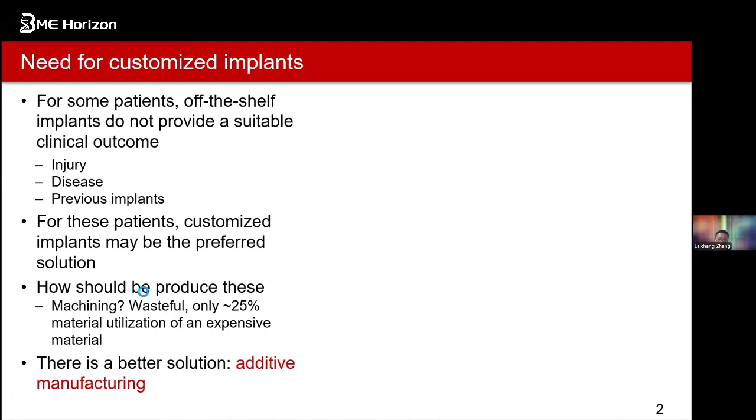Keep in mind, titanium material is quite expensive, and with this kind of waste, only about 25% material utilization is achieved for such expensive material - this raises costs for the patient. Therefore, 3D printing or additive manufacturing is a better option.

Especially for injury or disease cases - this is one real example from our customer, Royal Perth Hospital: an example of manufacturing a customized implant for a patient with osteoporosis.

So far, there are some materials that can be used for the structures. Most of them are commercial purity titanium alloys, and also titanium 6 aluminum 4 vanadium. Most of these we use for implants to replace our cortical bones for human beings.

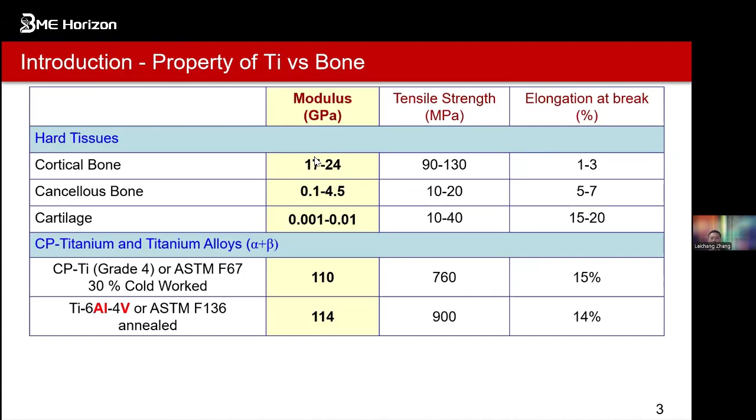But because there's a lot of difference between the Young's modulus or stiffness of the cortical bone and titanium alloys, this produces the well-known stress shielding phenomena. This will then require further surgery to fix these structures from the implant.

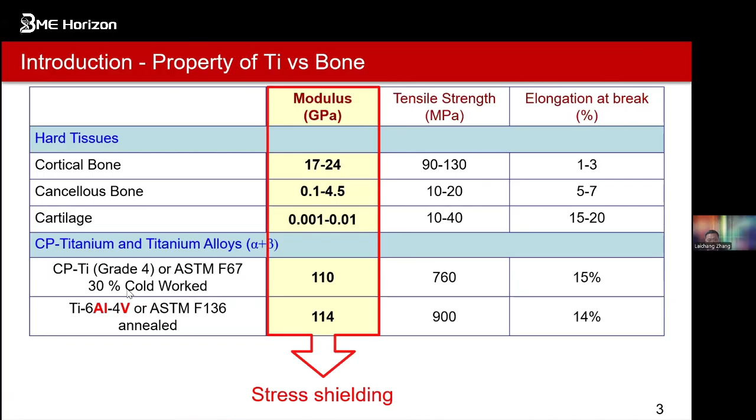So for this kind of way, we can still use porous structures to further reduce their modulus. We need to further optimize this kind of structure production. And of course, these complex porous structures can only be produced by 3D printing.

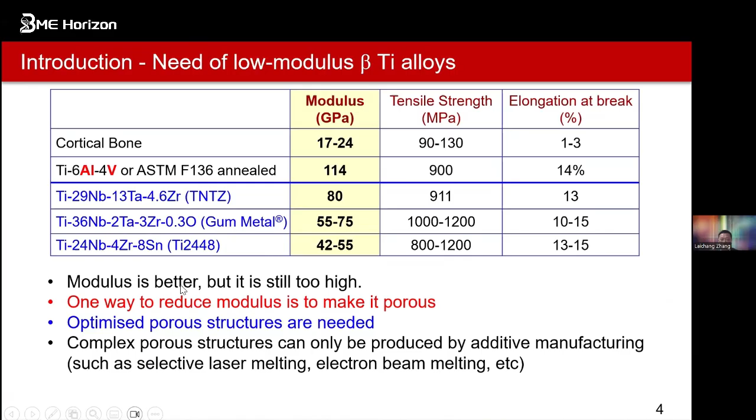For example, selective laser melting or electron beam melting. Of course, there's also a transition away from powder metallurgy for these things. So when we try to make anything here, we produce these structures.

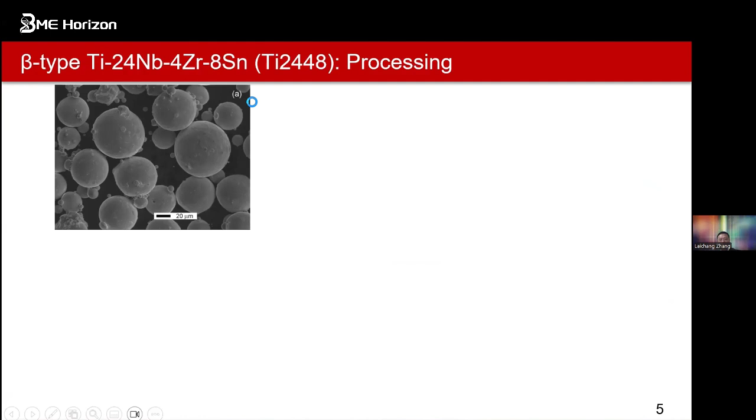So you can see with this kind of beta titanium alloys, we use mostly titanium. We start from spherical particles - Ti-24Nb-4Zr alloy, with niobium and zirconium. From the powders, we can produce the structures using 3D printing, which can give us the Young's modulus we want.

We should use the parameters from processing - for example, the laser power, velocity of the laser scan, hatch spacing, and layer thickness. With these parameters, we use a zigzag pattern to produce 3D printed parts from the powders for titanium cubes or structures.

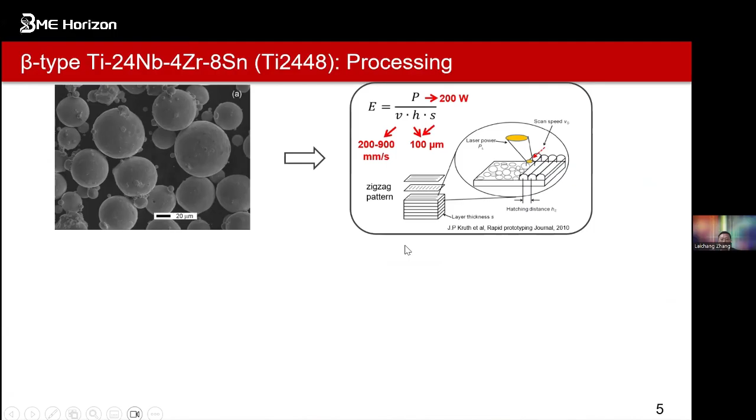Based on these things, the relative density is very important to get high performance in mechanical properties and corrosion resistance. For example, if the structure density is lower, the strength will not be good enough, and that's why it makes premature fracture. That's why most of the time we try to make the solid part more than 99% density.

So that's why we get this information with different parameters. We can see with the laser kept at 200 watts, reducing the scan speed, we can enhance the relative density, going up to 99%.

But we can still see the macro hardness tests will still increase with the relative density of these things, going really high. We can see that if the scan speed is roughly below 600, the relative density will go to 99%.

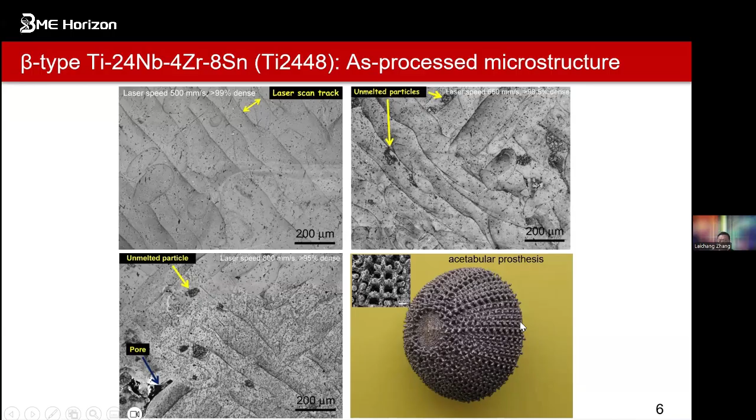They also produced an example of an acetabular prosthesis by selective laser melting at a laser power of 200 watts and a laser speed of 500 millimeters per second, because they can get near fully dense parts this way. We collaborated with the Royal Perth Hospital on this. The part has a complex and fine scanned scaffold structure on its outer surface, which improves bone ingrowth for implants of this structure.

We can also see the comparison of the tensile properties for the Ti-Nb alloys manufactured by 3D printing versus conventional processing methods.

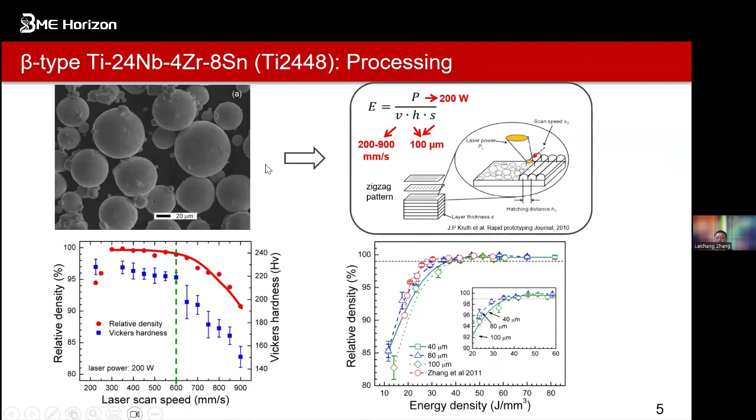Of course, we also produce a lot of titanium-niobium parts from powder mixing. Since this is from pre-alloyed powders, but we can also use a lot of mixed powder production to try to make the parts cheaper.

So we try mixing a lot of powder, and you can see the strength is very, very large, and ductility is also large. We didn't do much, but you can see that the ductility is quite large compared to the traditional way - that will be very, very good.

We can achieve more than 20% elongation in these parts, just by producing parts at low cost from pre-alloyed powder or from powder mixtures. But even this one still has a low Young's modulus, yet high strength.

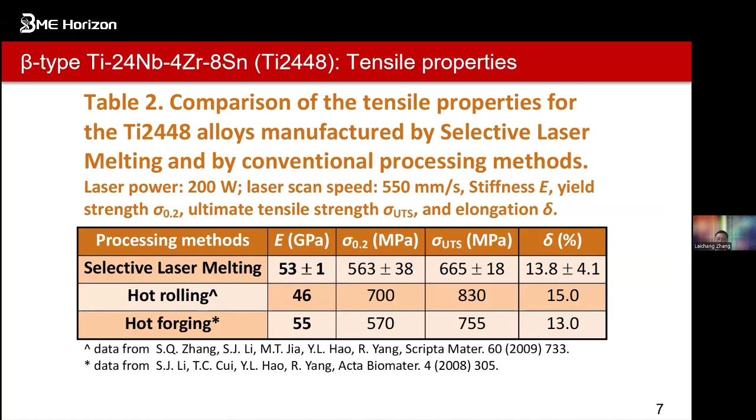As mentioned, the Young's modulus of cortical bone is roughly 30 gigapascals, but ours is 53 - still low, but we can further produce porous titanium parts with even lower Young's modulus. This way we can produce porous titanium alloys that can have a controlled, lower Young's modulus closer to the surrounding bone tissue.

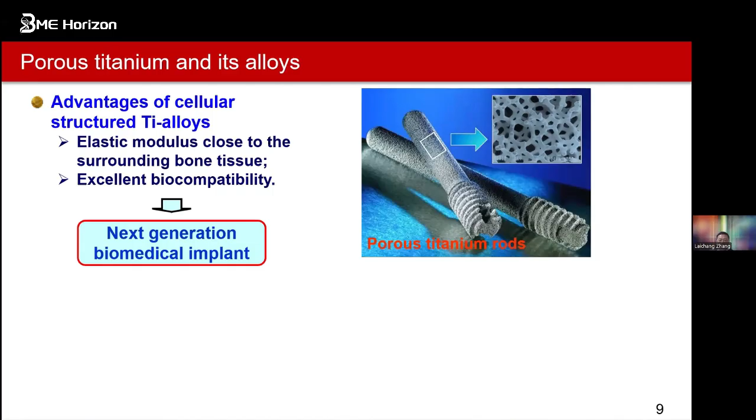Titanium alloys can have excellent biomedical compatibility, representing the next generation of biomedical implants. Traditionally, we can produce this kind of porous structure through powder sintering processing, gel casting processing, 3D fiber deposition, and self-propagating high temperature synthesis.

But for this traditional fabrication, there's one big issue: there are inherent limitations such as the presence of impurity phases, low porosity, and limited control over the size, shape, and distribution of the pores.

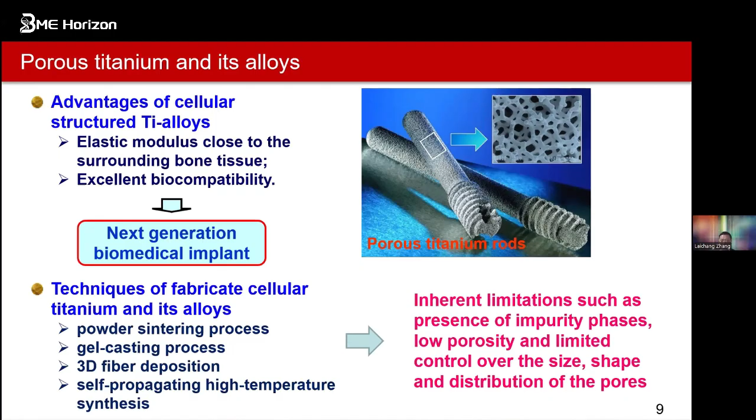That's why we had a lot of endeavors to develop new structures in this field - that's what we did. For example, with this approach, we can do many things.

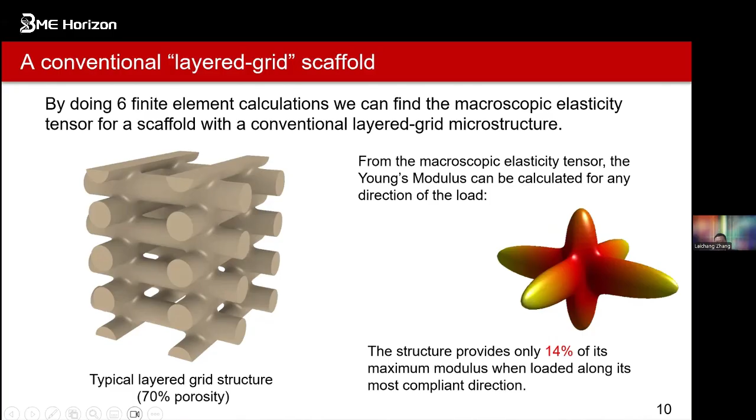inhomogeneity in elastic Young's modulus. You will see the Young's modulus, roughly the least stiff direction has only about 14% of the stiffness of the most stiff. So this is typically inhomogeneous of the structures. But we can also use the BCC structure.

So this structure has also been commonly used, but this is even worse in terms of the non-isotropic stiffness. You can see the minimum and maximum was roughly 0.09, so 9% of the stiffness.

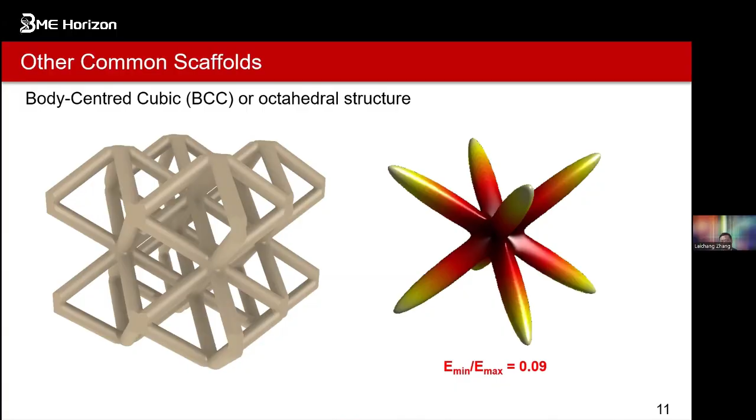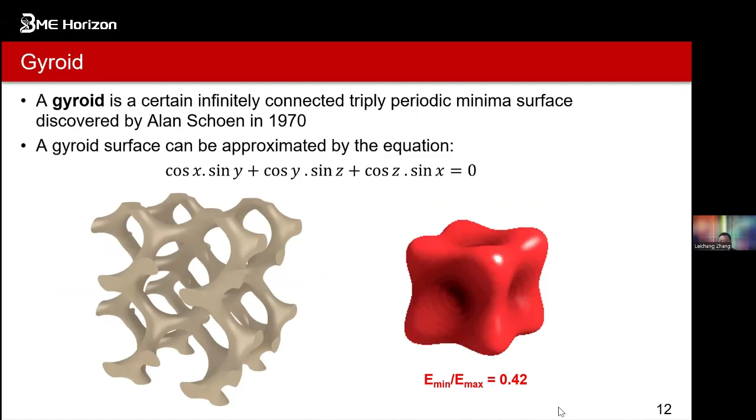Now another one is the gyroid structure, which has also been used, and it's better and also has better homogeneous stiffness. You will see the minima and maxima stiffness roughly 0.42. But we still say this is not sufficiently isotropic for this kind of structure.

So for these things, we use topology optimization to design the scaffold that would have maximum modulus for its weight and interconnected porosity. In addition, the design needed to be elastically isotropic and be able to be made in a range of different solid fractions.

So we proposed to use a computational design scaffold to jointly maximize scaffold bulk modulus and diffusivities of the pore space. This can ensure high scaffold stiffness and good transport process properties. And also, this is very important because this will try to make it elastically isotropic.

And also we have specific porosity because for different structures, for example if we come to our bones in head, face, and our skull, and also our knees and the shoulders and the legs, arms, of course the Young's modulus will be different. We will use one example to show later on.

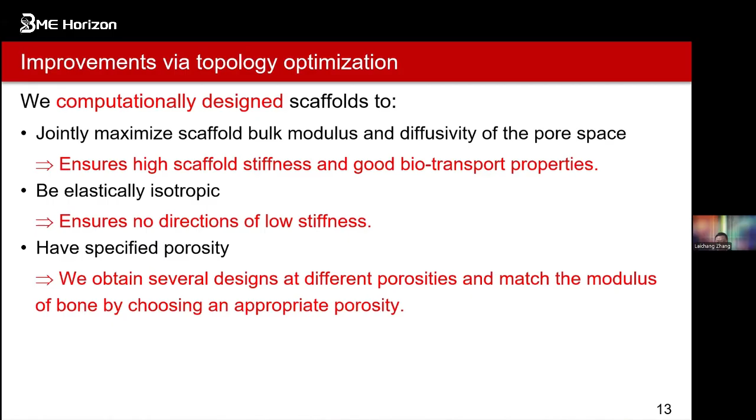So of course we try to obtain several designs at different porosities and match the modulus of a bone by choosing an appropriate porosity. For this kind of criteria, we design several types of porosity-optimized scaffolds.

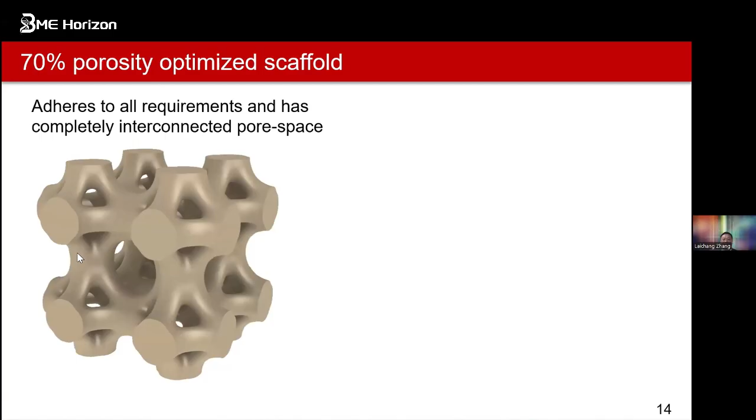For example, we adhere to all the requirements and we have this complete interconnected pore space. This is complicated, but this Young's modulus for all the way is homogeneous. So this is compared for the 70% porosity layered grid, it's roughly 0.14. So that means there's homogeneous structure in this kind of way.

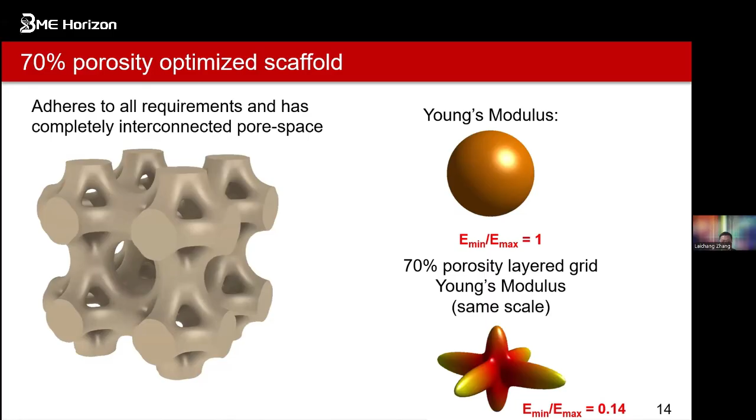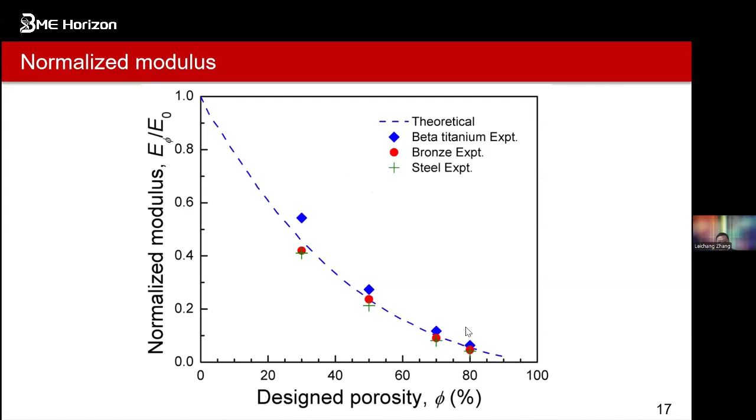That means this kind of structure can be produced very well. We can control the porosity and control the stiffness or Young's modulus, so we can make this close to cortical bone and match it for different locations.

We can see some examples of these things. For example, we try to match the modulus of bone, replacing cortical bone in the mandible. The mandible is used every day for talking and chewing, so we need a very comfortable implant.

The cortical Young's modulus is roughly 10 gigapascals, and we use titanium as the scaffold material, for example titanium 6 aluminum vanadium, whose modulus is roughly 100, let's just say 110, or 100 for example.

From this chart, we can get information on how to make the Young's modulus close to our implant, for example for the mandible model. Our target is 10, and the overall is 100, so 10 to 100 gives roughly 0.1. That's what we get from the chart.

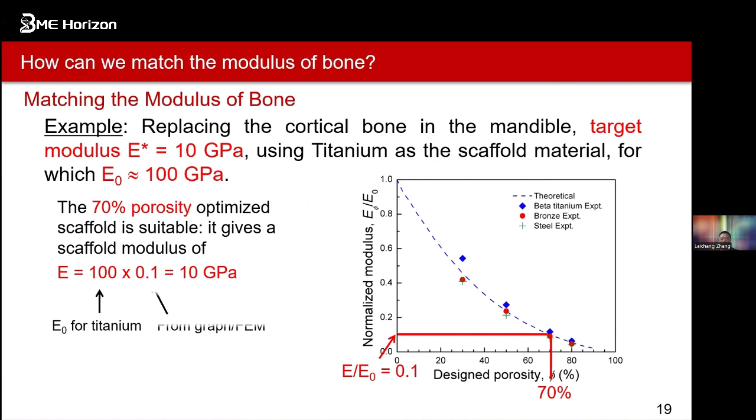So that's the work we can see for titanium from the graph — we can get the data very easily. Same way, we can use another material, Ti2448, a beta titanium alloy.

Again we're replacing cortical bone in the mandible, so again the target is about 10 gigapascals, but this time, because of the beta titanium, the modulus is roughly 50 gigapascals, as mentioned it's 53, but we'll use 50. From this chart we can say the normalized modulus is 10 over 50.

So from here we roughly get 0.2. From 0.2, this will be very useful — close to this value on the curve, we can see it's roughly 55%. So the 55% optimized scaffold is suitable for medical implants, giving a Young's modulus of roughly 10 gigapascals, so we can use this structure.

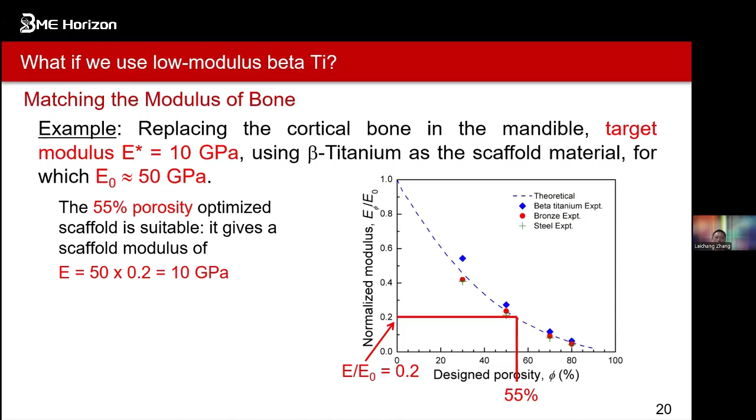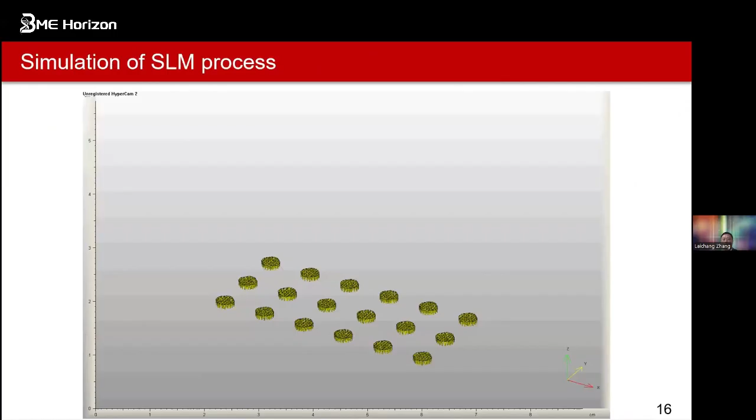So don't think it's quite easy to produce these parts using 3D printing — we still need a lot of technology, and we need the concepts. We understand 3D printing, then we can produce this kind of ideal structure. From the beginning, we tried to make this part as a whole, as a circle.

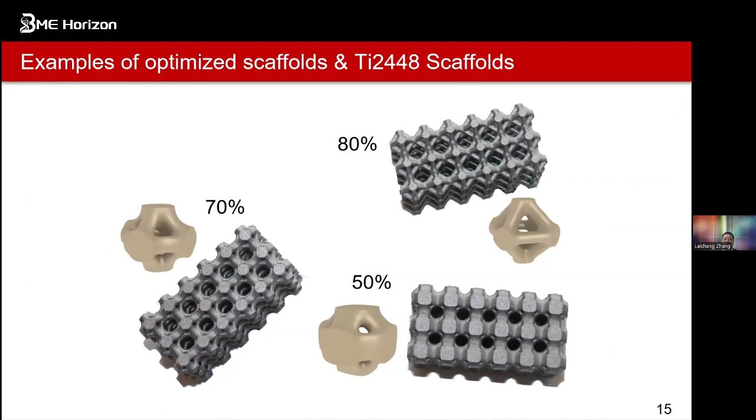For the first time, we produced this one totally closed - there's no opening. Then we tried to make this one open, like an ellipse, and then we go to a circle. So you can see it's simple, but not that simple. You still need a lot of skills and knowledge to make circles in the design.

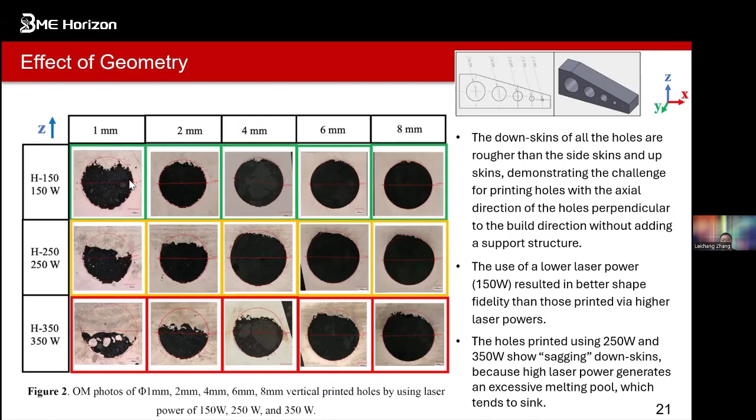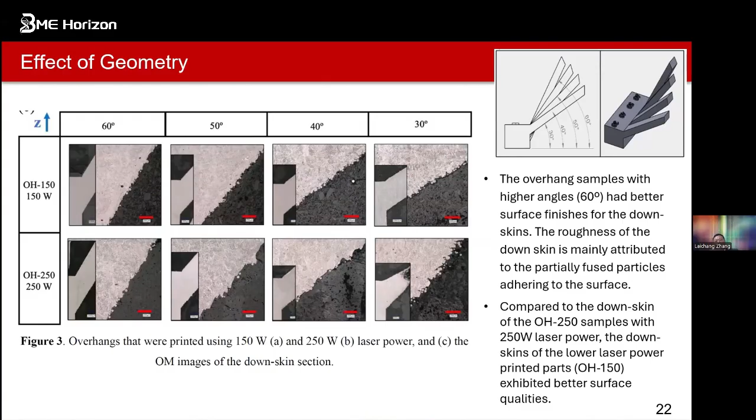So you still need a lot of knowledge of these kinds of structures to make these parts. If you look at an example, you can see this structure - if the pattern is not good, the down skin is not as great as we designed. You can also see a lot of holes here, and the dark ones are holes.

This is from fabrication. You can also see the thickness and smoothness of the strut. That's why the parameters as designed are not as good as we thought. So I'll put some conclusions on this part.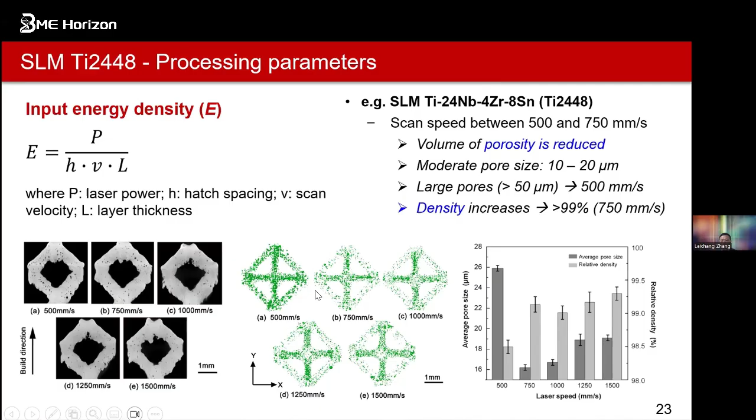You can see there are some parameters - the scan speed will change things like strut thickness in these kinds of structures. You will see a lot of changes in these structures - the density will change and the mechanical properties will be changed.

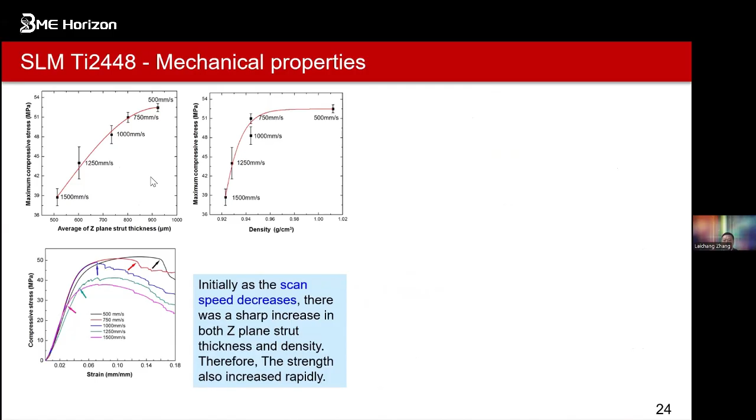So we still need a lot of knowledge to optimize the structures before we can produce them. When the structure is not good, it will produce a lot of holes inside, and the part will break much earlier than predicted. That's what we call premature failure, caused by insufficient relative density in the structure.

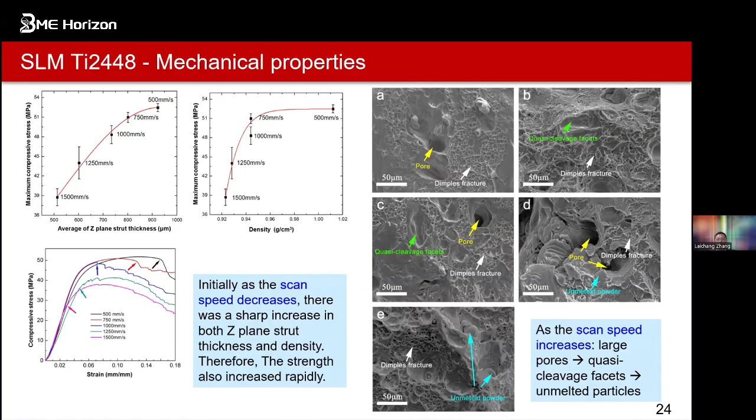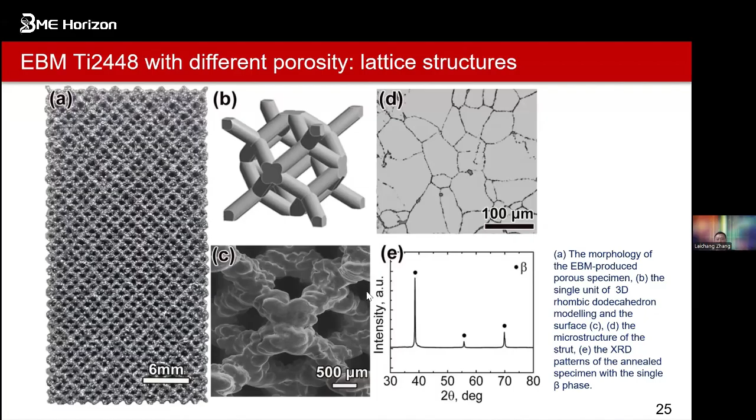From here, we tried to make this one about beta titanium, and we compared the two popular methods - one is electron beam melting, which we call EBM, and the other is selective laser melting, which we call SLM. You will see the surface will be different.

So now, of course, we can summarize these parts.

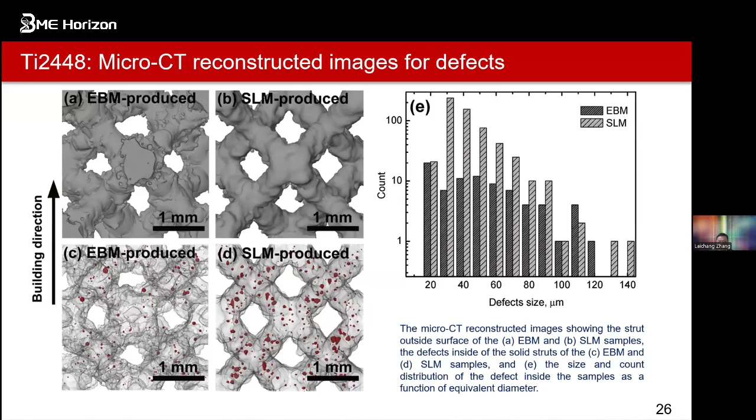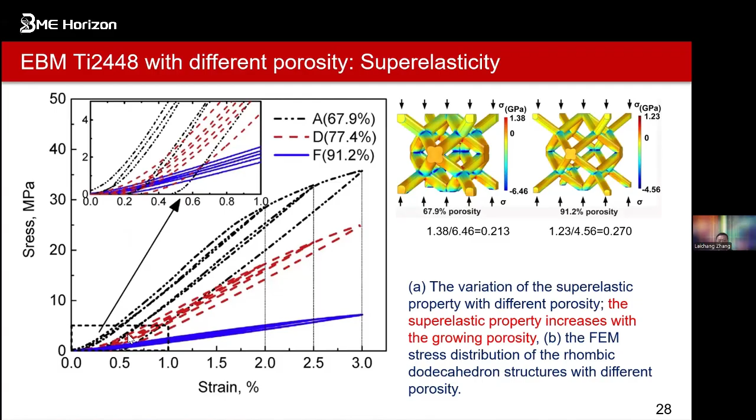For easy reading, we only show the super elasticity of lattice structures at porosity levels of 68, 77, and 91 percent to clearly illustrate these things. With increasing porosity, the super elasticity increases because they are fully recovered. There is still some overlap, meaning there is still plastic deformation of these structures.

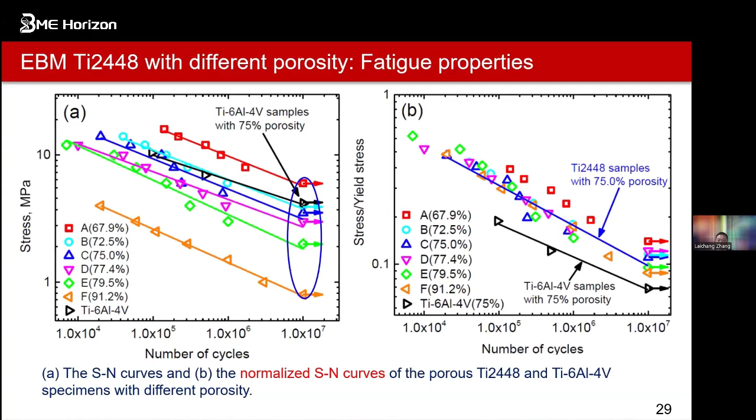Loading, unloading, loading, unloading. If this can fully repeat, for example, that means it becomes fully elastic. Like for us, if we wear shoes, we really want shoes with good elasticity. Otherwise it feels so tight, so tough to wear.

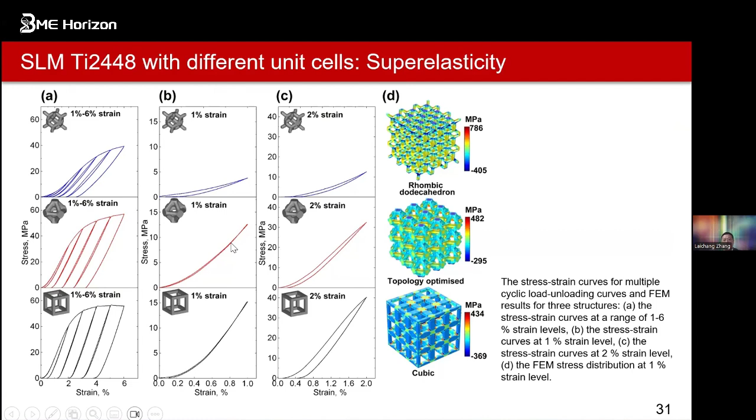So from here, if we see it is fully covered, that means there is no or limited plastic deformation that has taken place. So that's why from here we can see the elastic deformation, and we can get the information.

We can get parameters in different ways. We can get the data for the total energy, which includes the elastic deformation and also the plastic deformation. So from the curve, if this one is higher and larger, it has more total energy because of both the elastic deformation and plastic deformation.

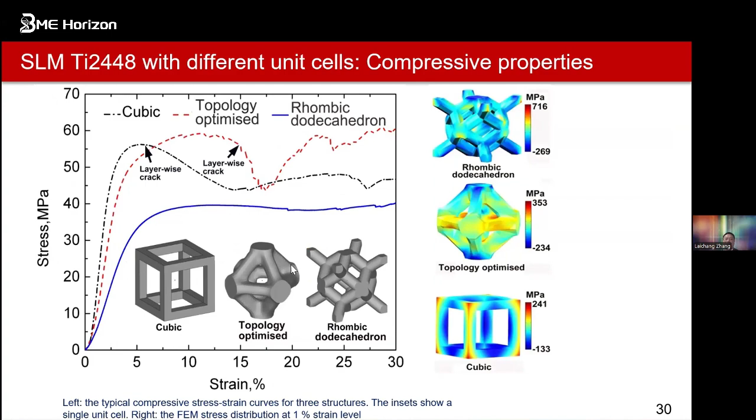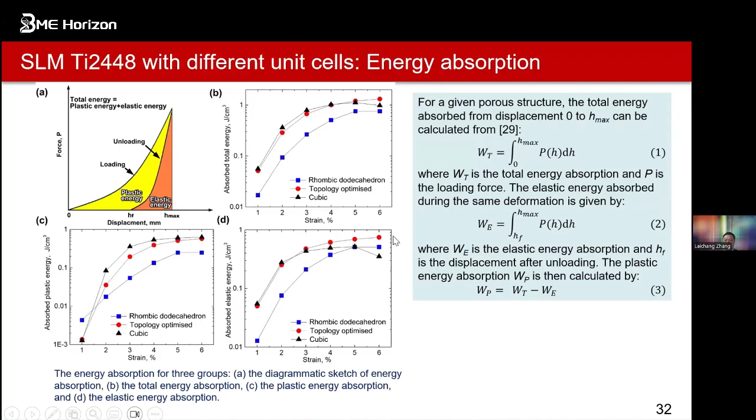That's because of the high strength and large ductility. So from here we get the idea, but we must care about the elastic energy because that's the energy absorption. You can see the topological one has large elastic energy, so that's good for replacing this thing.

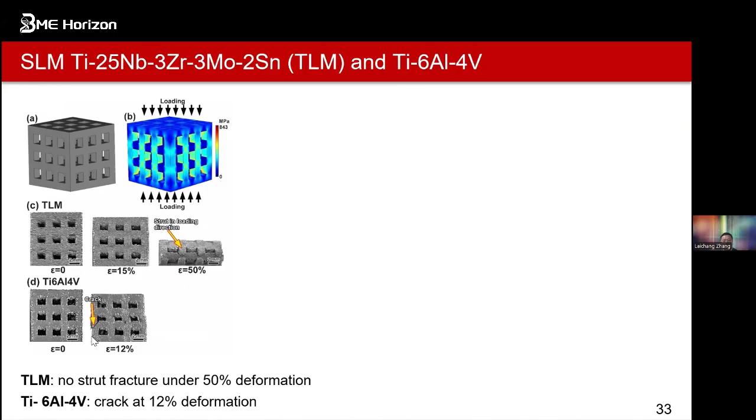Still, we can compare different materials. This is for TLM - Ti-25 niobium, 3 zirconium, 3 moly, and 2 tin - and we compare with titanium 6 aluminum. This one is a cubic structure, but for TLM, this is the beta type - there's no layer-wise crack, just gradual deformation. But when we come to Ti-6Al-4V, you can see it's a layer crack.

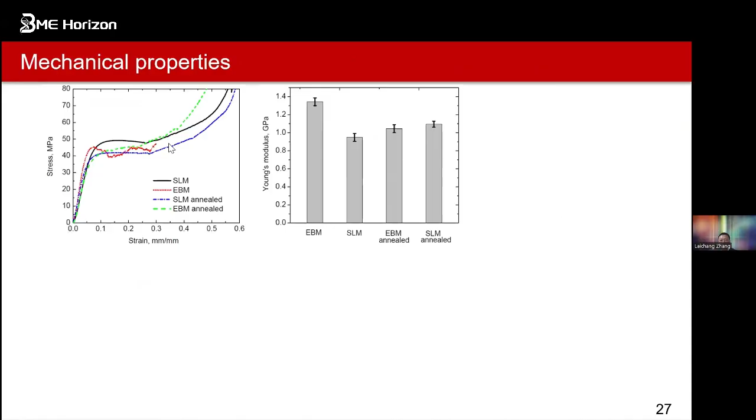So that's why from here you can see these structures - it's a layer-wise crack, because of the alpha phase inside. So from here we can get the structure, and then from these things we get the data. Basically we can see it's always broken this way. Titanium 6 aluminum vanadium breaks at 12%, but for TLM, this beta phase just gradually deforms, then closes.

That's why they can go further. So all these things we can see for beta titanium alloys from these two types. You can see there's no layer-wise crack, so for the beta titanium alloys, that's a non-layer-wise fracture. So the structure is quite good, and also the material.

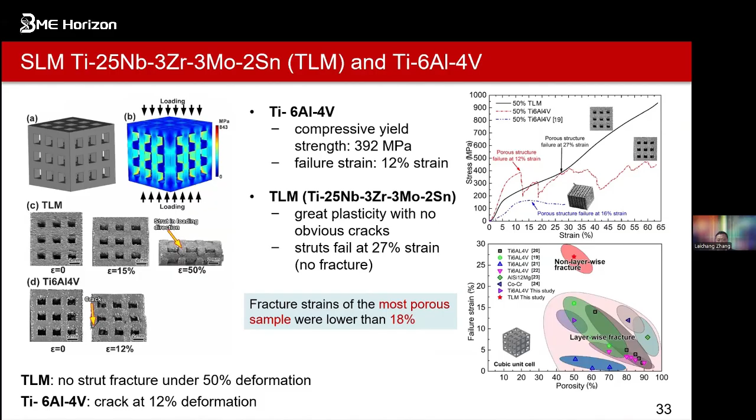Still, we can compare the unit cell and the materials for properties. You will see from here this CP titanium, commercial pure titanium, and titanium 6 aluminium 4 vanadium. We can see this kind of structure with the first failure from here.

So that's why, for example, we try to implant the scaffold in our bones, for example for mandible and also hips. So we should consider the structures for these things. We can compare the structures, and we can see all the things can produce.

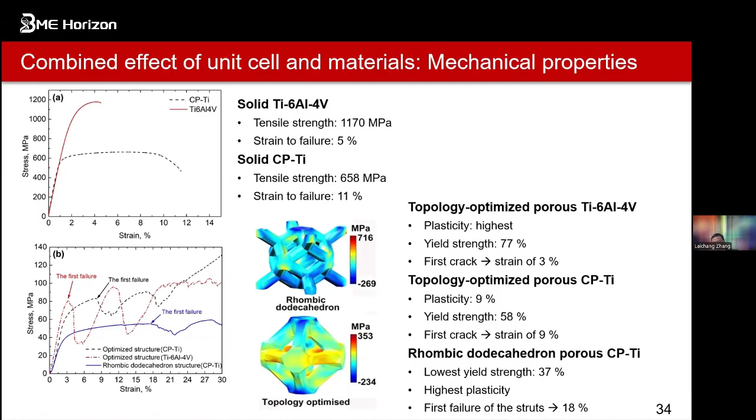And that's why you can see the first failure is very important, because we see where they will fail. So that's why you can see from the first crack, this titanium 6 aluminium 4 vanadium is not good. Compared to CP titanium, other things are quite good. So it's different. Still we can compare the fatigue life from the other things.

Of course, we still work a lot on the corrosion and the biocompatibility with Professor Chen, and also my student will do it. But because of time, we cannot include so many details here. So if you are keen to know more details, you can search for my papers, and also you can send me a message to get information.

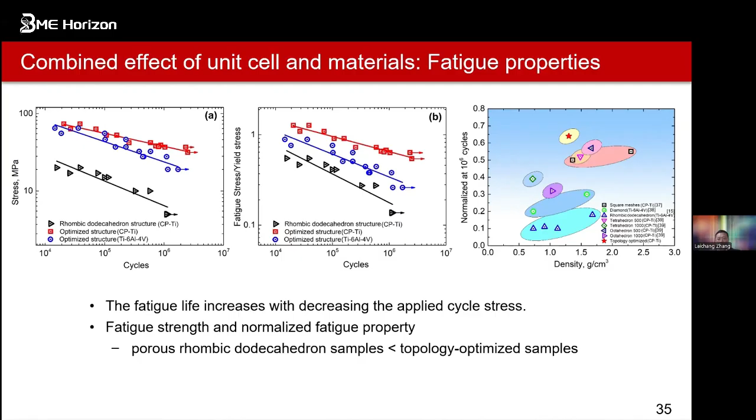For example, here we discuss the essential details of why we design these things, and what kind of properties are needed for the bone of human beings. And also we can see from the 3D printing of different structures, there are a lot of samples produced by 3D printing, which could have good mechanical properties for fatigue life and also biocompatibility.